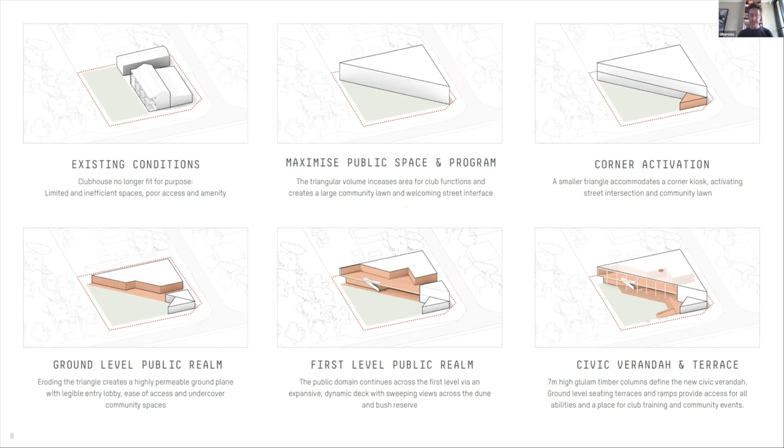And finally, defining these eroded edges as a civic veranda utilising 7-metre high glulam columns and adding an apron of ground level seating terraces and ramps providing access for all and an activated edge to the club lawn.

The triangular ground floor footprint accommodates patrol vehicle garaging and aquatic storage, change rooms, junior lounge, admin office and kiosk. Circulation is efficiently kept to a minimum, yet generously connects the street to the veranda and communal lawn to the west. The services yard along the northern boundary allows for back of house functions and washdown area, safely separating these activities from the more public lawn spaces to the west.

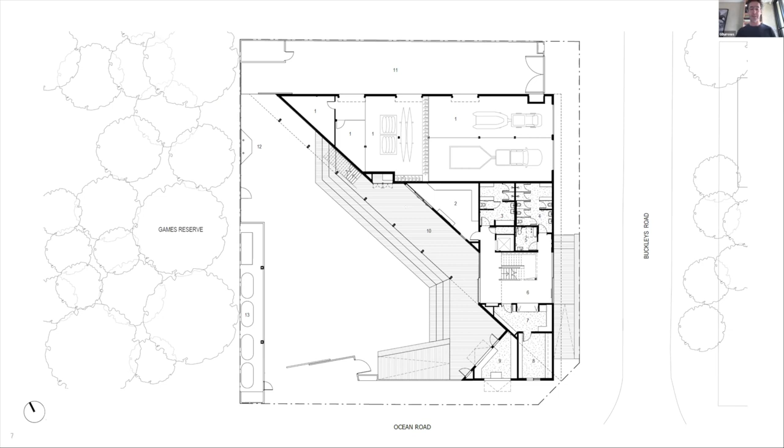Perimeter tanks for the CFA access and rainwater retention and reuse sit along the western boundary. The site can be entered from either Buckley's or Ocean Road. The first floor plan accommodates a club meeting room, toilets, and a multifunction space that is served by a bar and commercial kitchen. The multifunction space opens onto the large and dynamic upper level undercover deck that enjoys sweeping views to the coastal dune beyond.

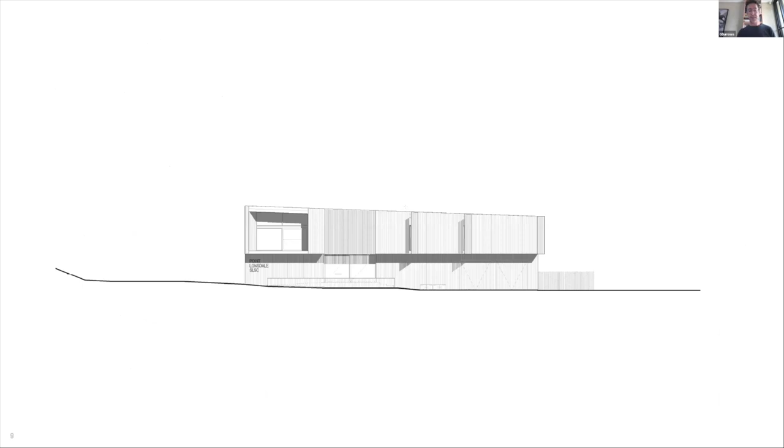Here's an east elevation of Buckley's Road, which includes the primary entry and a large window to the club meeting room at the upper level. Whereas the Ocean Road elevation demonstrates the civic veranda addressing the dunes. And a sectional elevation demonstrates the double height entry lobby and void connecting ground floor with the upper level and verandas at both levels.

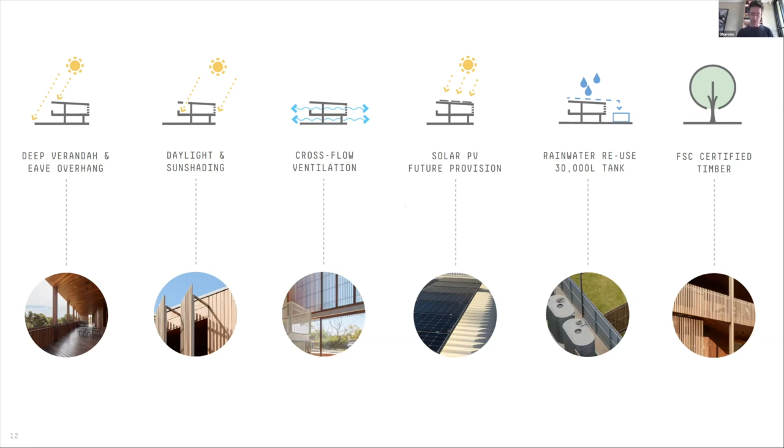As a cost-sensitive community project, we set out to achieve a number of sustainable initiatives from simple first principle approaches. These include west-facing decks protected by deep verandas and eave overhangs, external timber screens and shading to northern glazing, daylight allowed deep into the plan via roof light, cross-flow ventilation through louvered and sliding glass windows, services connections for future provision of rooftop solar, a 30,000 litre rainwater tank providing reusable water for toilets and washdown, and FSC certified timber specified, being spotted gum.

Reflecting close collaboration between the club, consultant team and a builder passionate about timber detailing, the project resolves complex fire separation and BAL 19 bushfire rating requirements for a lightweight structure, whilst meeting the project budget. The design team worked hand in hand with the committee through extensive value management workshops, and many goods and services were offered and provided on a low bono or pro bono basis.

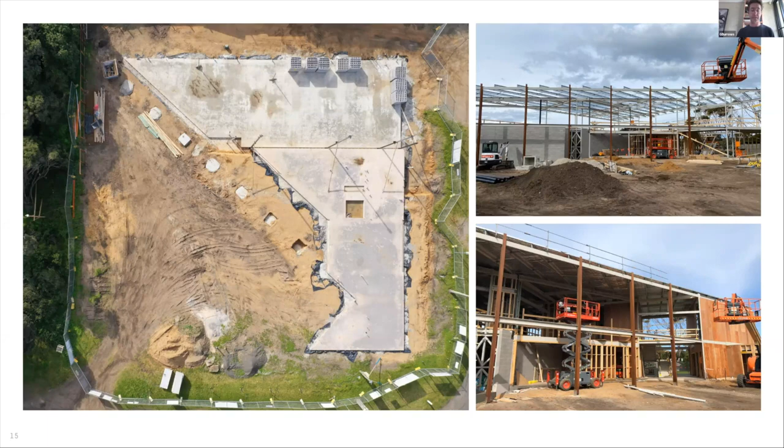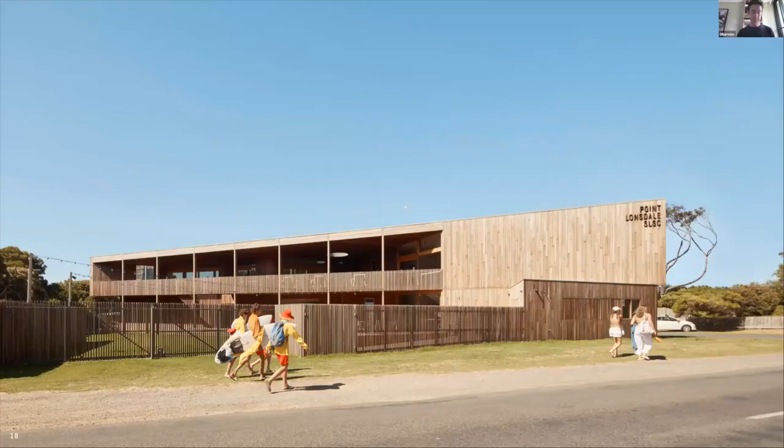And here's a view from the dunes during construction, with the simplicity and clarity of the triangular geometries becoming evident. To the project completed, and the building is seen from the crest of the dune on the way back from the Back Beach base, nestling gently into the coastal environment. The civic address of the Ocean Road facade and veranda. This is the primary face of the building for most beachgoers returning from a day over the dunes.